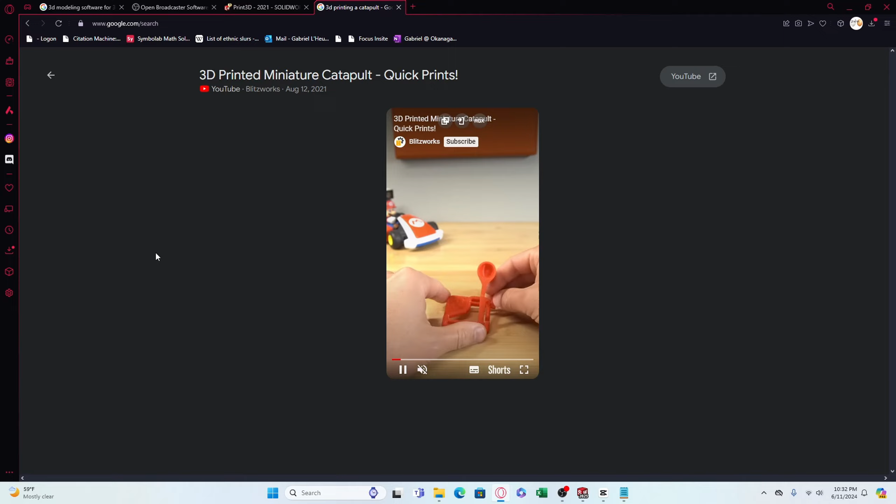For the last couple of weeks, I've been getting this creative itch that I just really needed to scratch. I wanted to do something with 3D printing, but I really wasn't sure what to make. So I just started to rack my brain for ideas on what to print. Well, for me, it really didn't take long to figure out what I wanted to do.

I really wanted to make a catapult. There's nothing particularly special to me about a catapult. I just thought it'd be really cool to make something that can shoot stuff.

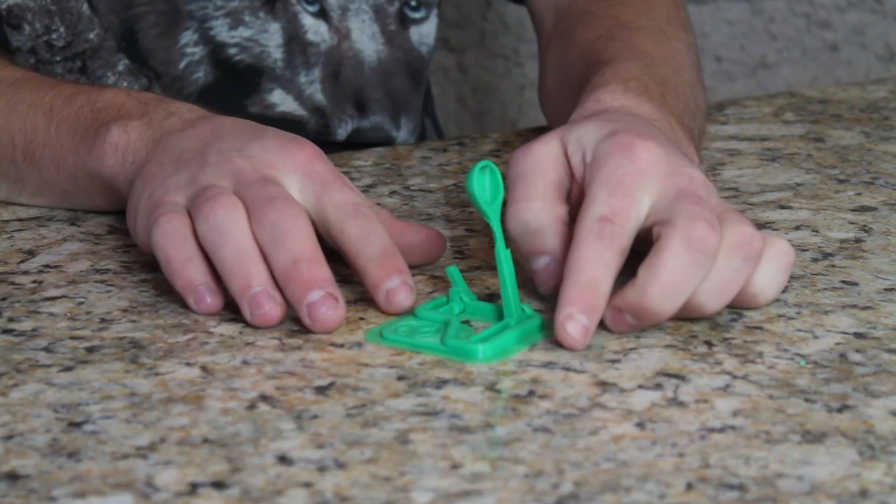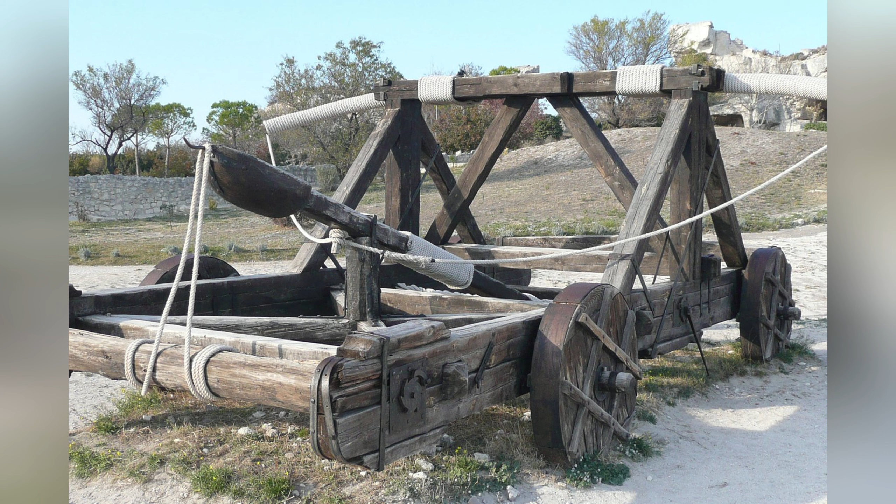The catapults that I showed in the opening B-roll were either not historically accurate or just far too complicated for my first project. I wanted to make something that was currently not available, historically accurate, and easy to assemble. So, because I want it to be easily assembled, I don't want it to require screws or glue for the construction.

My hope is that with this project, I'll become more familiar with 3D printing and design. And when it comes time to 3D print it, I'd like to try different plastics and print orientations just to test what is the most robust and durable.

The first thing I did when it came to this project was make sure it's actually possible to 3D print models from SOLIDWORKS. I'm aware that I'm going to need a slicing program of some sort, but I'm just leaving that up for later me to figure out and solve. I chose SOLIDWORKS because I already had it and I was pretty familiar with it, and it's a software that's still used in industry, so I figured it wouldn't hurt to be more familiar with it.

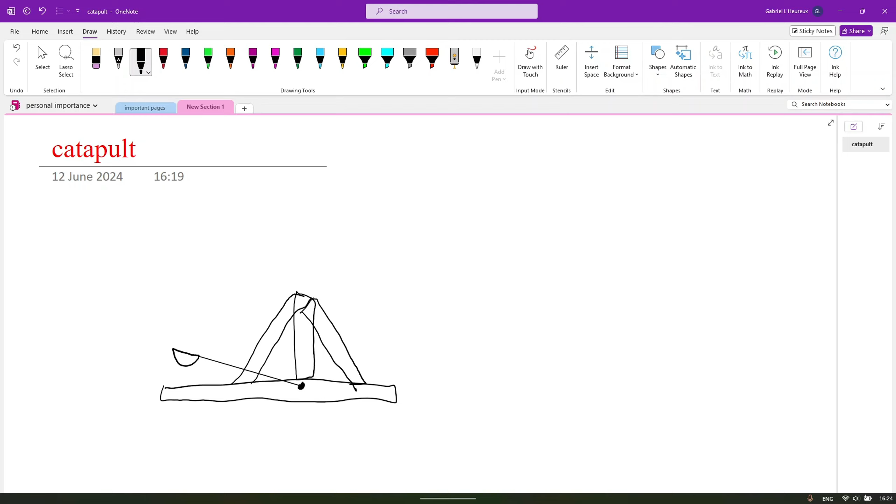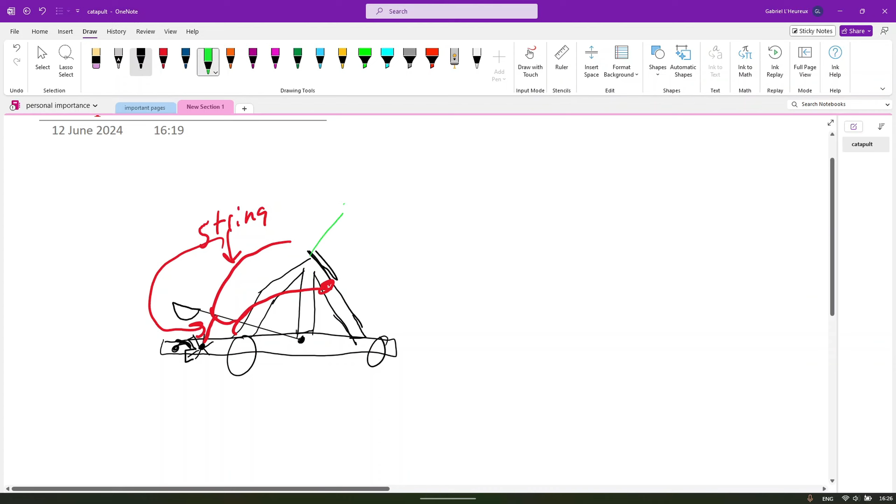Here you can see me roughing out some designs that I plan to make on SOLIDWORKS on my OneNote app. My design is based off of this catapult that I saw online. I chose this one because it looks simple, and as I said earlier, I want this to be easy to assemble, but you will need some string for this. Though I figure this is still much simpler than the other designs available online, so I think I'll just allow myself to require one piece of string.

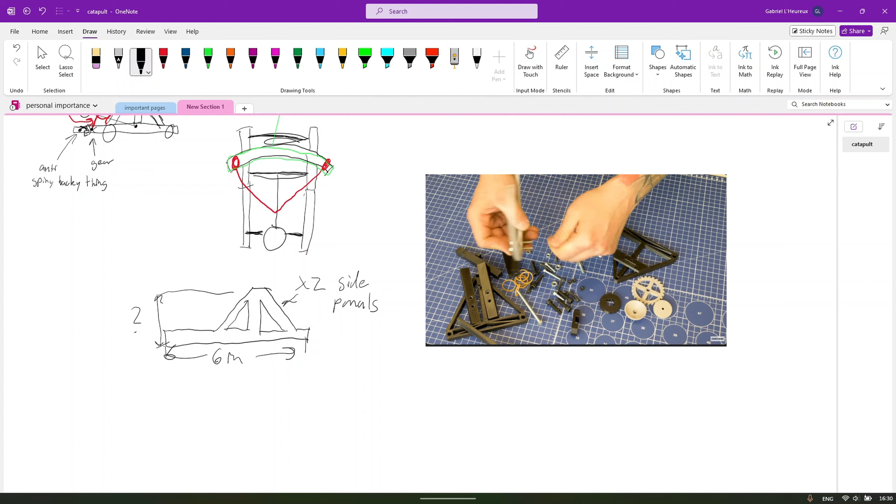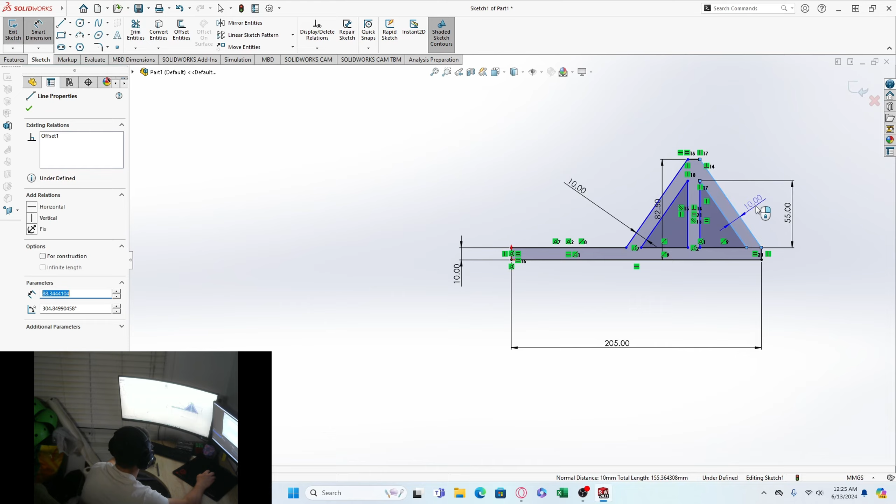So right after drawing those rough sketches, I started whipping up some models in SOLIDWORKS. These parts are going to be simple at first, and that's on purpose. I just want to make sure that everything will fit together nicely. That's a lot easier when you're working with simple models.

Once everything fits together nicely, though, I'll start working on the more complex details, such as how everything's actually going to physically fit together. I'll probably use friction fits or some woodworking kind of joinery, but for now, I'm just making it real simple and getting everything together.

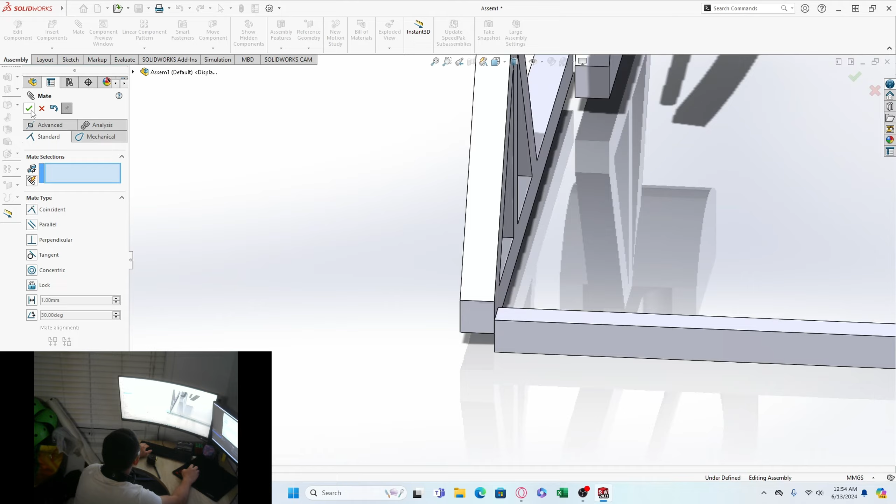So that's where I just left it for the day. The bow frame was being a real pain in the butt, and it wasn't attaching properly to the rest of the frame. I figured that this was pretty good progress for just one day, and I addressed it the next.

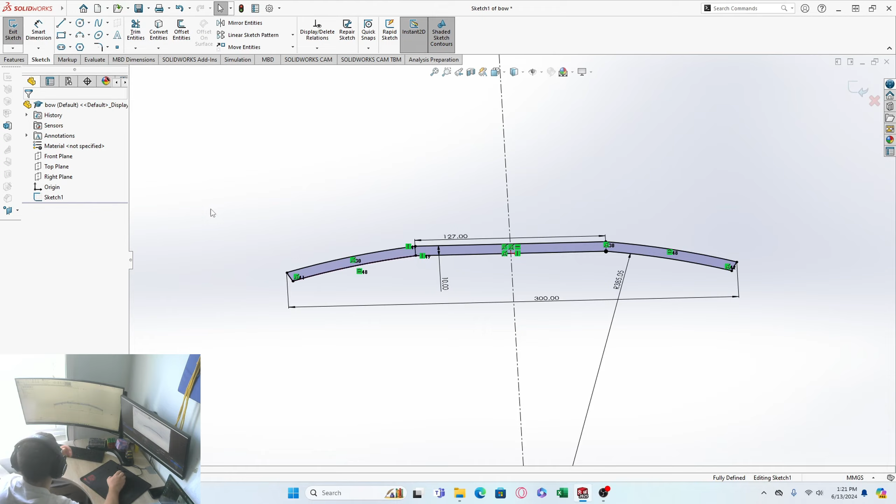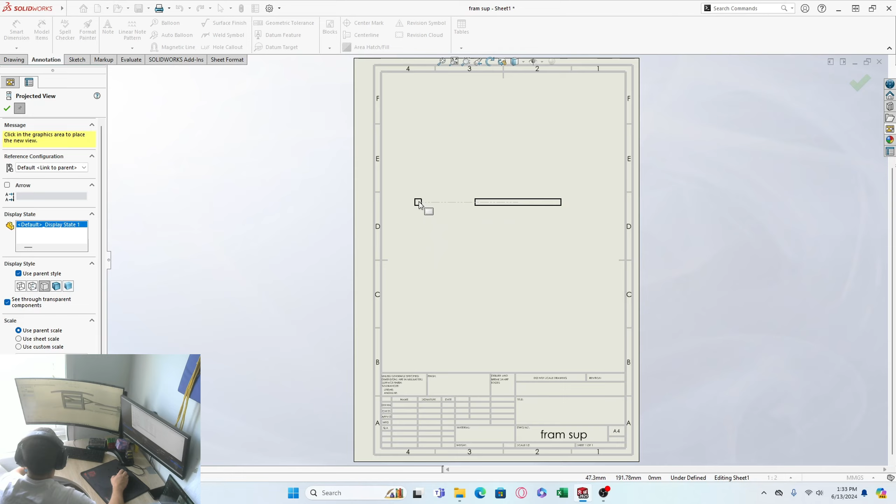The next day, I remodeled the bow. I gave it that extruded rectangular bit so that there would be a flat surface to mate against the frame. Next, I put holes through the launcher and the frame for the axle to go. Then I made drawings for all the parts. This will help with the documentation for what I expect to be just one version of many for this catapult.

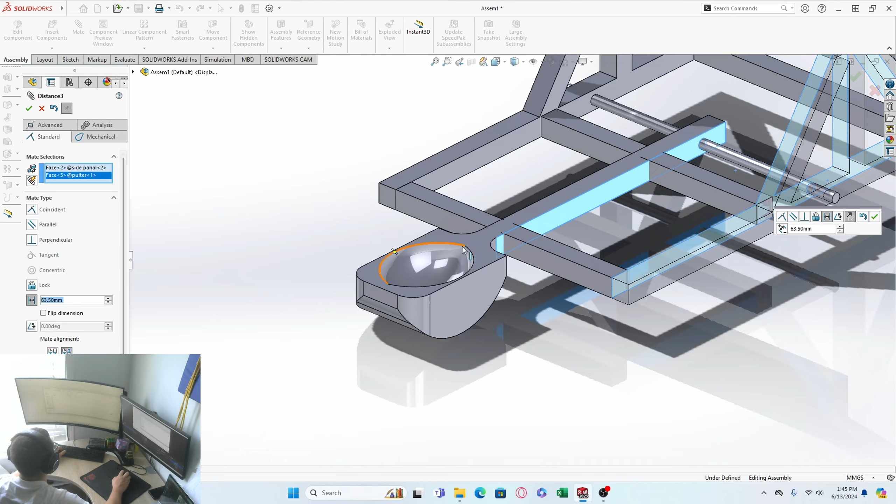When I started fitting everything together, I noticed that the bottom of the launcher pokes out beneath the frame, which would prevent full range of motion if I were to actuate it on a flat surface. So I'm going to have to add some wheels later.

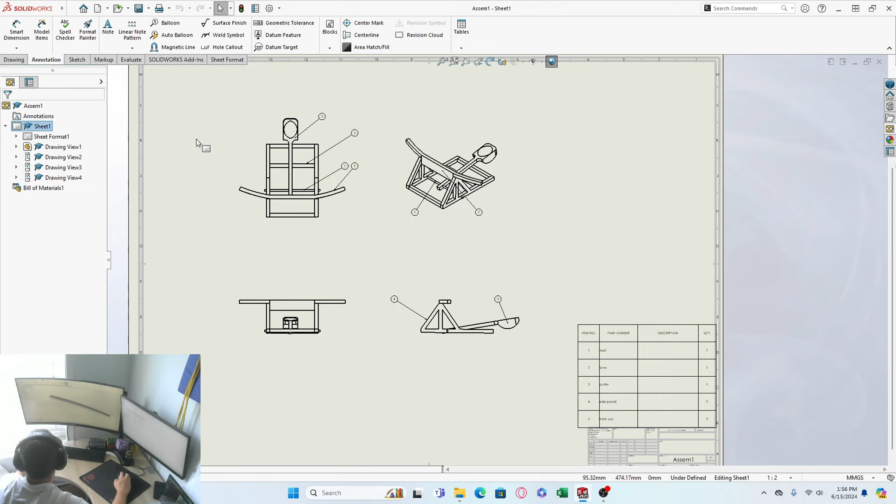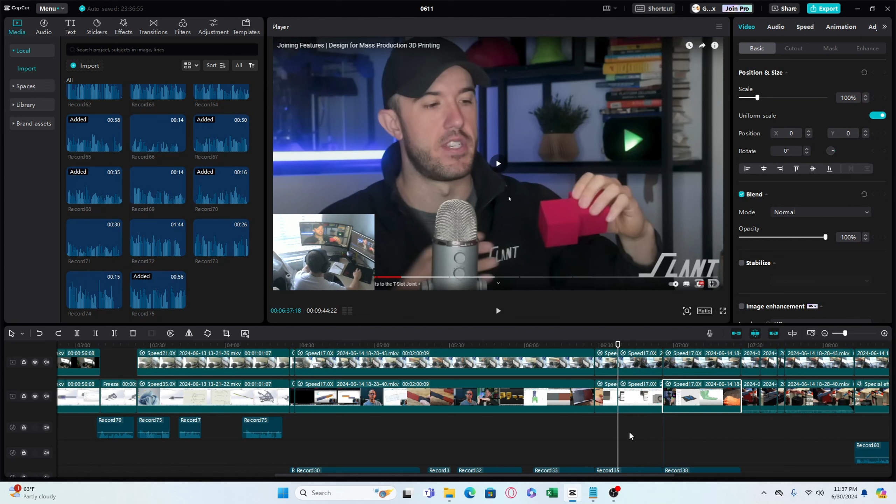Okay, so on day three, all right, I'm not going to go on talking about all these different videos I watched. I watched like three or four, and honestly, they're not that great. But this last one right here is absolute gold. It's got a lot of practical knowledge, and there's actual real stress testing on these things that's very useful for something like what I'm doing. So we're just going to cut this out to save you the time, and it's just going to be a better video. Trust me, okay? You just got to trust me.

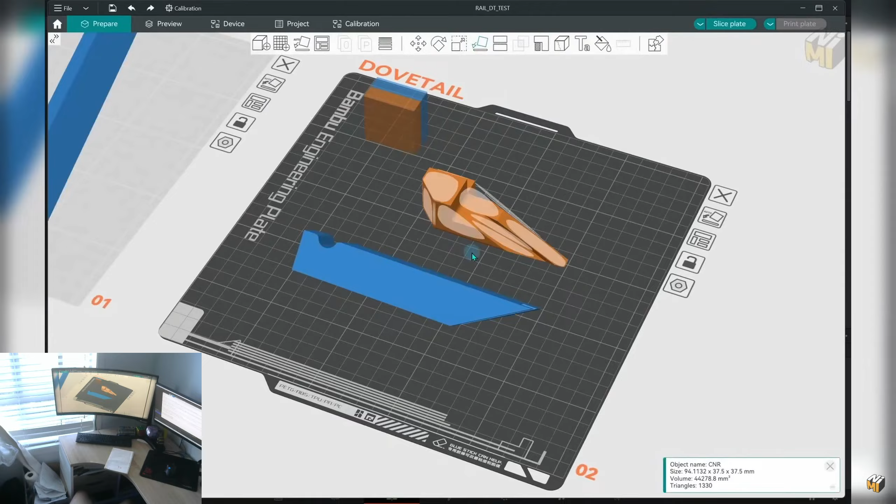Now here is the best video I watched. I watched about like 2 hours worth of videos. This one does strength testing on 3 different types of joints.

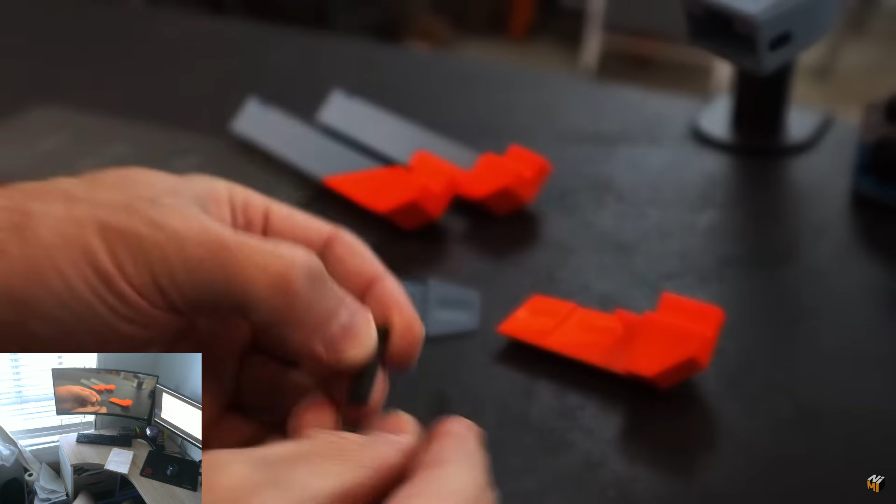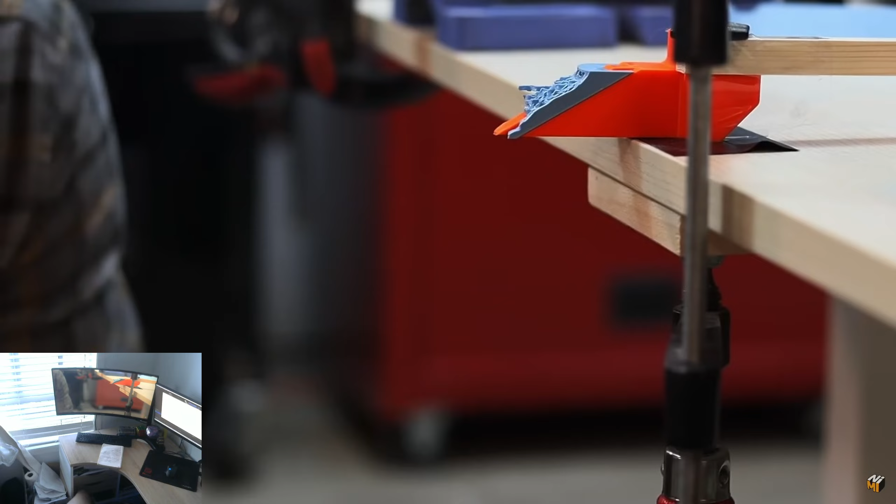27.5 pounds. 30 pounds. 30 pounds. How on earth? So correction, the last one was 52.5. I forgot to remove a plate, so this one is 55.

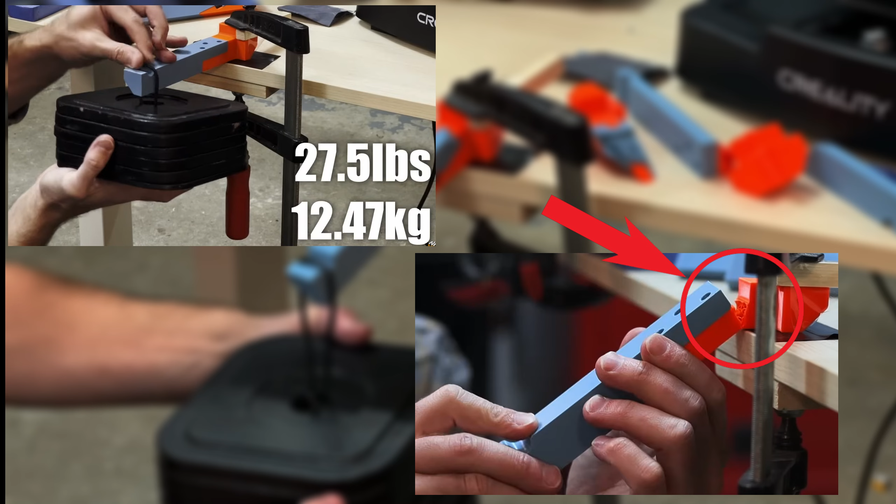This member fractures right where the joint starts. You can see that the fractured area is much smaller than the overall cross-sectional area of the member. This happens because in order to have both parts of the member overlap in that way, you need to reduce the area of both of the members. So I will consider this to be a joint failure.

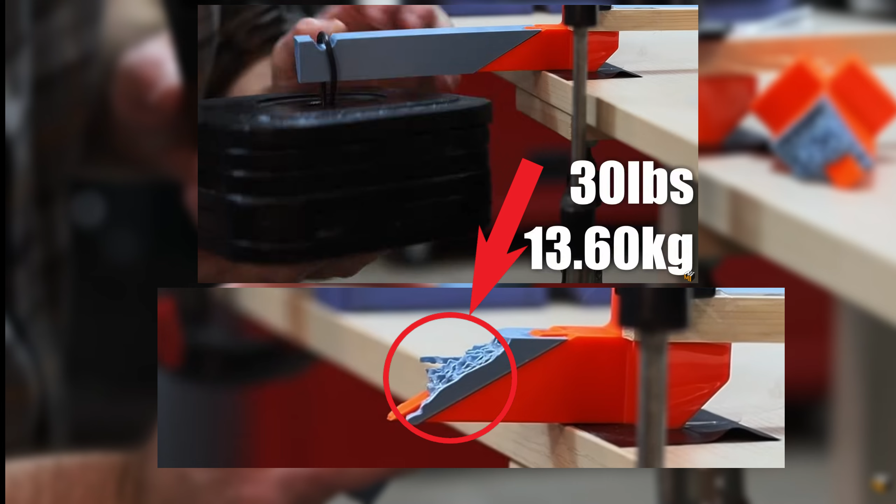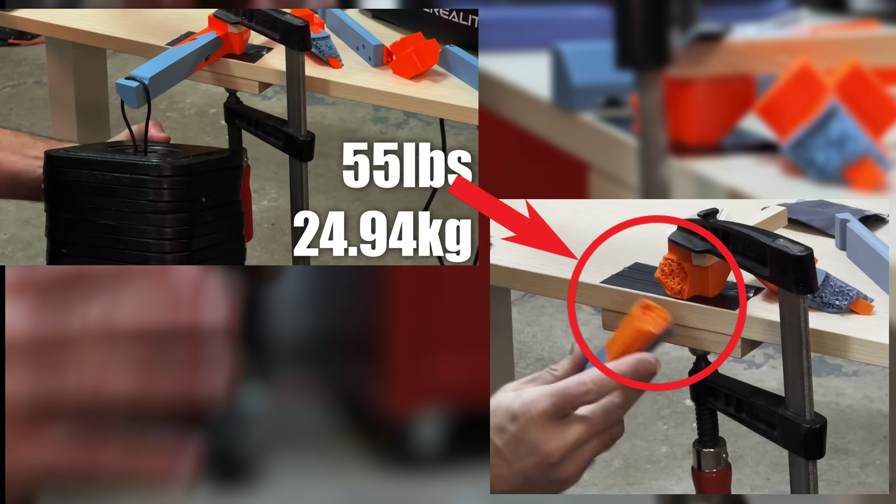This member fractures right in the middle of the joint. I think once again this is due to a reduction in the area of the fracture plane. Therefore, I'd consider this a joint failure. As you can see, the final joint failed at 55 pounds, which is nearly double the weight of the next best joint. The fracture plane did not occur within the joint itself, so I'd consider this to be a material failure. But perhaps with a stronger infill pattern, you would see the joint itself fail, but that is not the case.

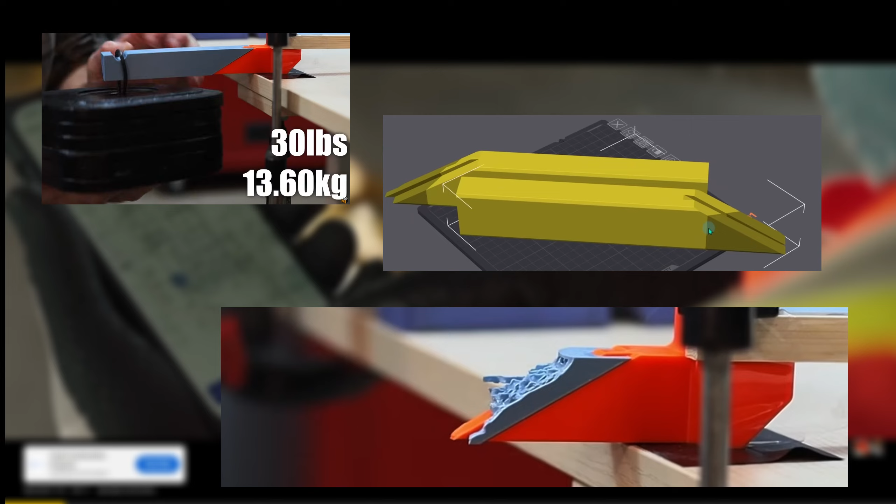I think though that ultimately I'm gonna have to go with this tapered dovetail design. Although it has a lower maximum capacity, it's a lot better for the size that I'm working with. In order for this joinery that's used for woodworking to be usable and done only with 3D printing, I think I'm gonna have to have like a 1 inch by 1 inch sizing for my members, which I think would just be too big for my application.

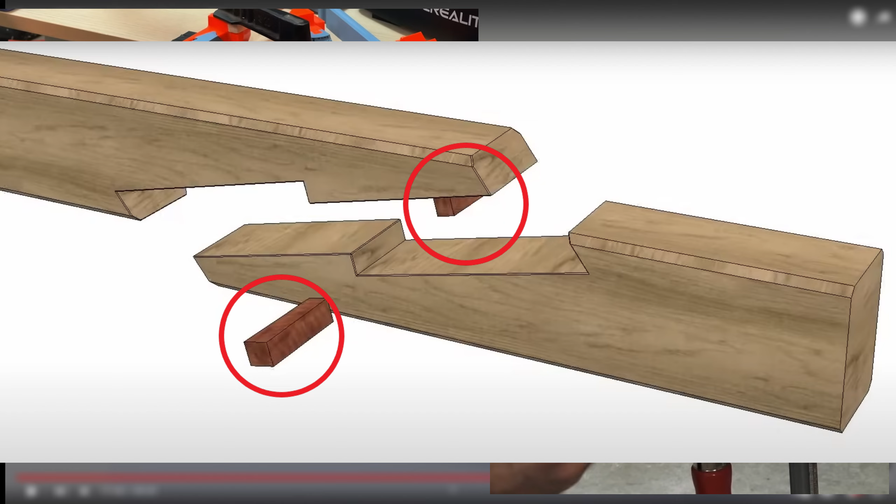My worry is that if I were to have to print out these little wedges, that when you go to try and mush them in together, that they would just break because they're too weak. Just really small cross-sectional area, and then trying to force them in, I think the forces required would just be too high. And that's why ultimately I will be going with the tapered dovetail.